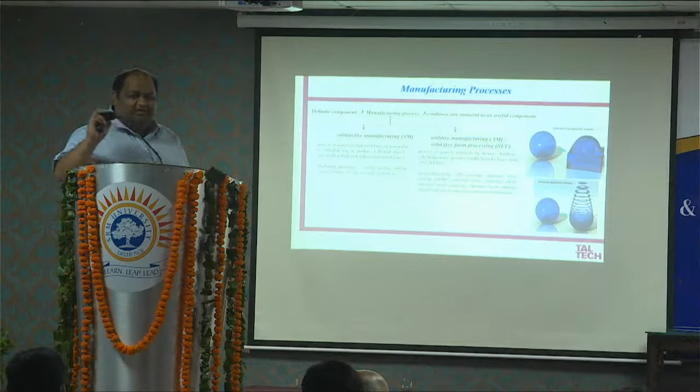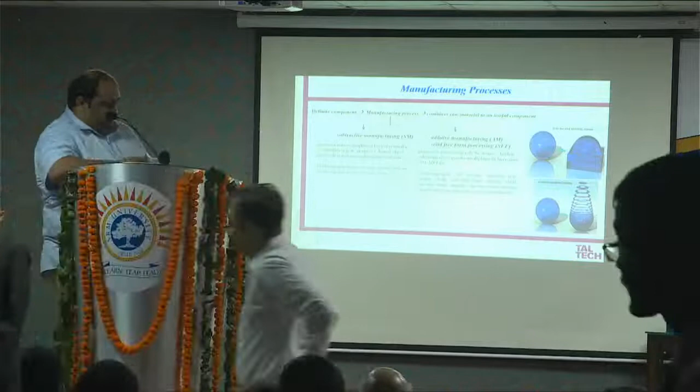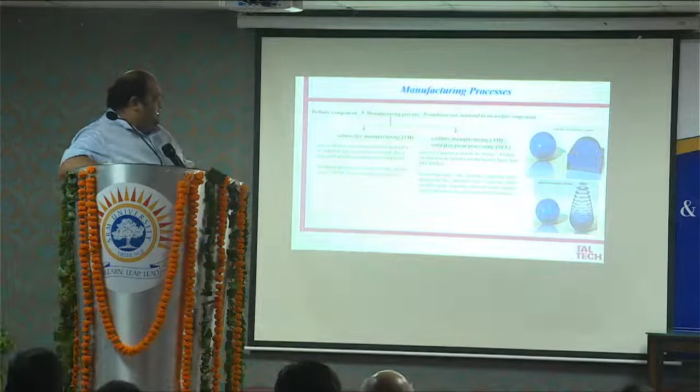Additive manufacturing is one of the processes that fits the theme of the conference, where we talk about manufacturing for sustainability, because as you see from these images, we use both conventional manufacturing and additive manufacturing to make the same component, like a sphere. With conventional manufacturing, we remove most of the unwanted material from a bulk to make the sphere. With the additive approach, we add material layer by layer, using only the amount needed, so there is minimal or nil wastage. It is one of the sustainable manufacturing processes that can produce three-dimensional components with minimum material usage.

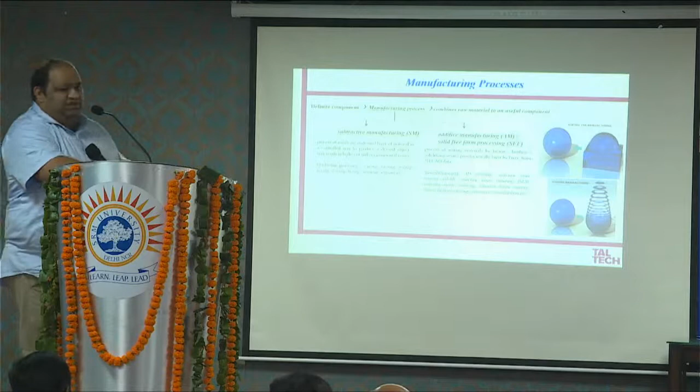However, when you want to produce such a component using some metal additive manufacturing processes, you may need excess material which can be recycled every time, because you need a certain specific dead weight all the time. But the material usage is still limited or restricted to that particular component being produced.

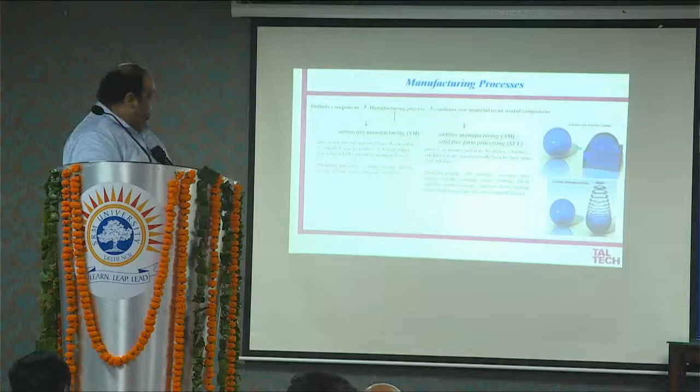It has a very big advantage because since we are producing these components layer by layer, we have flexibility in terms of geometry. You do not have to worry about the shape of the material, because in principle we can produce any shape without restriction. You also have flexibility in terms of geography, because you are not tied to any industry or setup at any particular location. You can design the part anywhere in the world and feed the data anywhere else.

This is very significant because even in a war field or a medical emergency, you can feed the data and produce any prosthesis or component at that particular instance where and when it is required. So the process is relatively quick with most polymer-based additive manufacturing processes. With metal additive manufacturing, it may take more time because of other constraints that consume time, but in general the process is rather quick with respect to the design approach, and it can be produced anywhere without restrictions.

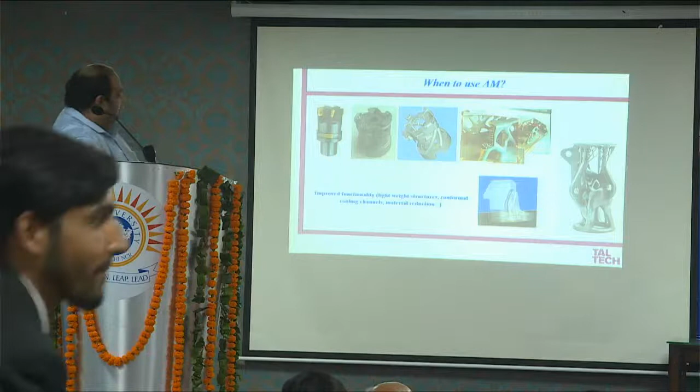And even within this complexity, they want to reduce the dead weight of the component. Instead of making a bulk of the component, they have introduced some kind of structures inside so that you can reduce the weight of the component by a third or even more. In such conditions where you want to improve the functionality, where you want to improve the life of the component by reducing dead weight, additive manufacturing will be one of the foremost manufacturing processes for manufacturing these devices.

Also here, the main focus is to reduce the dead weight and to increase the complexity. Assume if you want to produce such a shape using a conventional manufacturing process, you have to mill so many areas and it is going to take considerable time. But on the other hand, with additive, we can produce this with ease and without much time to expose.

This is a typical example. This is one of the burner heads which has been used by Siemens for quite a long time. And this one particular component is assembled from 18 components. So in order to save the assembly costs, Siemens has come up with the use of additive manufacturing technology where the same component can be built in one piece instead of assembling 18 particular components.

And for producing this particular component, Siemens has developed an additive manufacturing park in Sweden where they are producing this particular component for the whole year using 10 different machines. So even bulk manufacturing is possible through the additive route, and you can save the assembly costs by introducing additive manufacturing, because this will be the only process where you can save such assembly costs for such complex shaped or sized components.

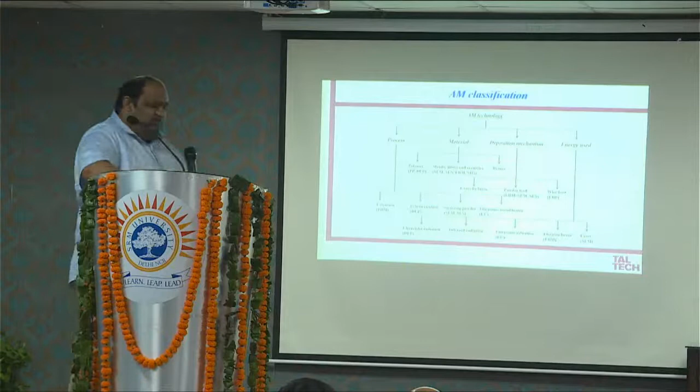So I have given the primitive classification of additive manufacturing processes over here. Initially, when the technology was introduced, they classified these processes under such categories depending upon the process which you are going to use, or depending upon the material which you are going to produce, or depending upon the deposition mechanism which you are going to employ, or the type of energy which you are going to use for depositing the material. Since all of these additive manufacturing processes are a layer by layer approach, we need some kind of energy to be used at every stage, at every layer.

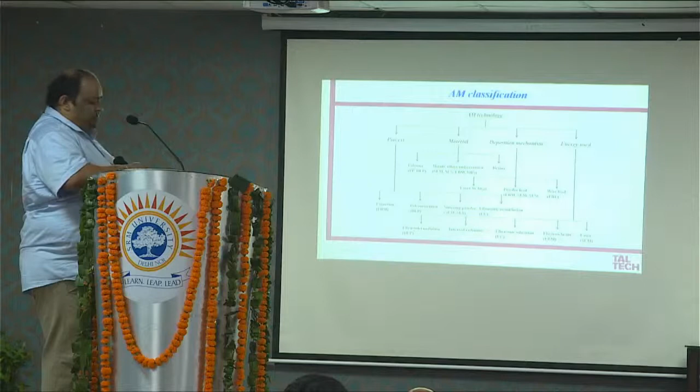Based on that, they can be classified. The energies that can be used for the consolidation processes can be ultraviolet radiation. In most of the polymer-based processes, you use ultraviolet radiation. Also infrared radiation is also used for most of the polymer-based processes. Ultrasonic consolidation is generally used for metals to be consolidated, electron beam welding and laser beam, electron beam melting and laser beam. So you can use either laser beam or electron beam, and nowadays people have also started using plasma for such additive manufacturing technologies, where they have used plasma for wire arc additive manufacturing processes.

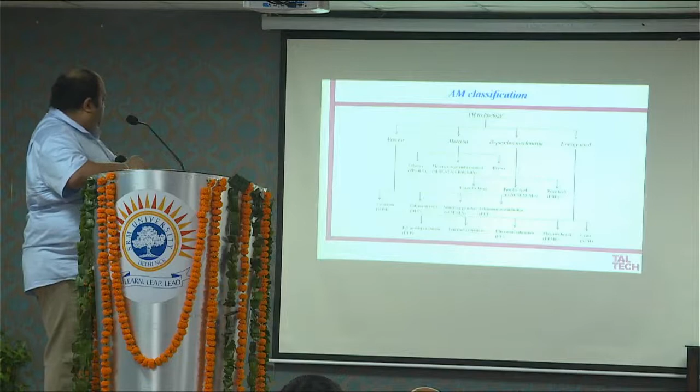And when it comes to processes, it's not working.

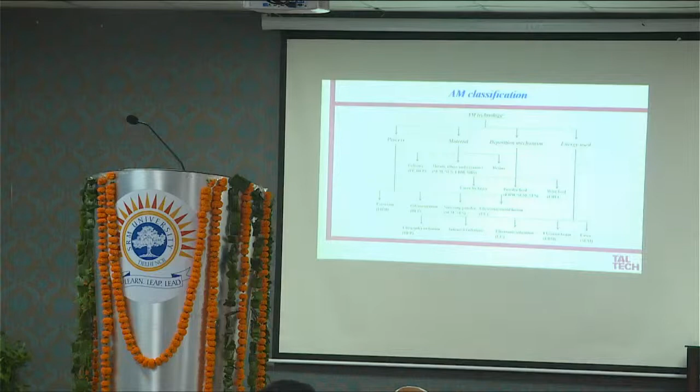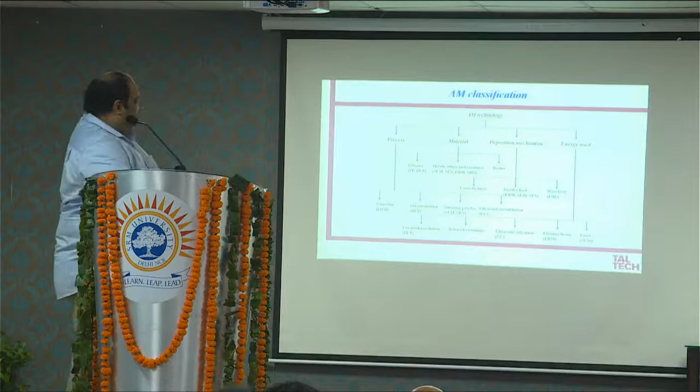Depending upon the processes used, they can be classified based on extrusion-based mechanism. This is fused deposition modeling, which is the most widely used polymer-based additive manufacturing approach, or based on photopolymerization or polymerization in combination with ultraviolet or infrared radiation, or using sintering of metal powders, or using complete melting of either metal powders or wires.

Similarly, depending upon the material, they are classified based on either metals, polymers, composites, or resins, and depending upon that, the processes are classified. The last but not least is using the deposition mechanism.

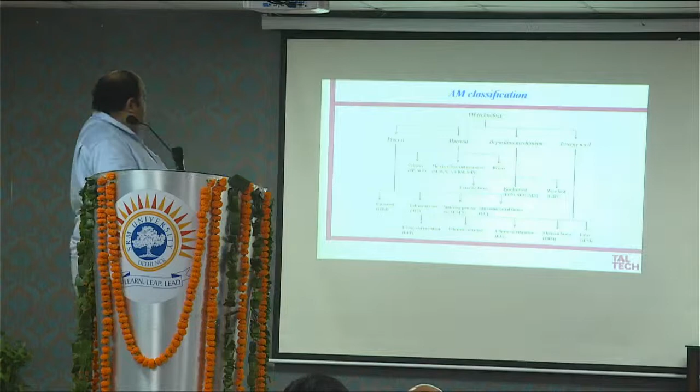Most additive manufacturing processes use raw material as powder, wire, or sheet. So based on that, you have either powder fed processes, powder bed processes, wire fed processes, or sheet based lamination processes, which are layer by layer. All these are layer by layer, but to be precise, sheet based processes. This is the primitive classification where people initially classified the available technologies.

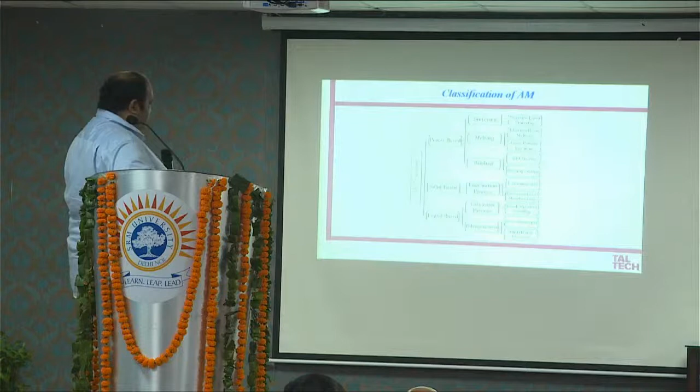Now, as per the ASTM standards, we have confined or clubbed several processes together, and now the classification is completely based on 6 different approaches: either sintering, melting, binding, lamination, extrusion, or polymerization. All the additive manufacturing processes come under these 6 different approaches.

For instance, there is a process called selective laser sintering, which is used for sintering either polymeric or metallic powders, which uses powder bed approach, and which uses polymers as the starting material.

When it comes to laser melting, we have several processes which fall under this category. It can be selective laser melting, electron beam melting, direct energy deposition, wire arc additive manufacturing. There are several processes that involve melting as a primary joining mechanism.

We also have binding based processes where you use external binders or resins, combining them with powders, and then you debind the resin later so that you get a 3-dimensional component.

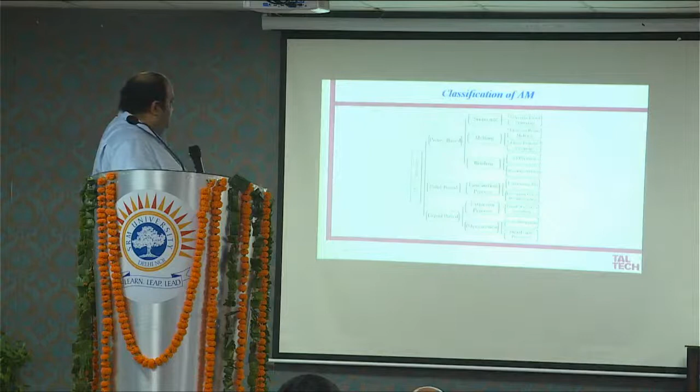Or you go for the least used process like lamination, where you use sheets connected together using ultrasonic vibrations, or the widely used polymer based process, extrusion based fused deposition modeling, which you can see in most labs, and photopolymerization, a typical example being the stereolithographic process.

So this is the basic 6 classifications used to combine all the present additive manufacturing processes in the market.

I will try to focus a little bit just on metal additive manufacturing, because that is where most of the interest lies nowadays, and try to give a glimpse of the available metal additive manufacturing processes.

The first is called powder bed fusion process. From the name itself, it's clear that we are going to use powder as raw material, powder bed as a deposition mechanism, and fusion or melting as a source of joining these powder particles.

There are a few processes which involve this particular approach: either electron beam melting or laser beam melting. It's clear from the name itself, either you are using electron or laser as the energy source. And then we also have direct energy deposition, which also uses laser as the energy source.

So the powder bed fusion process using laser is the most widely used metal additive manufacturing process, which you can find in most places even now in India.

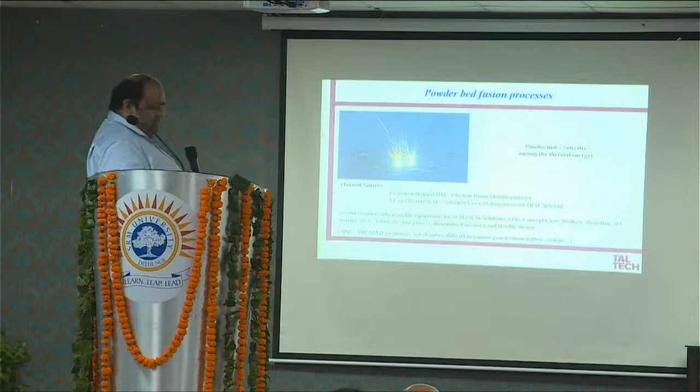And this can produce a wide combination of materials. We will see the combination of materials as we go by.

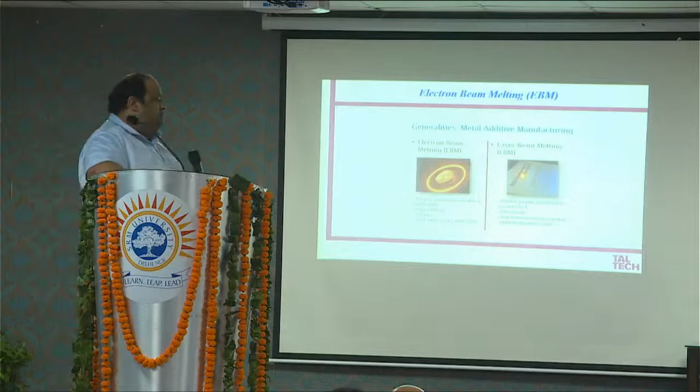The other one is, as I said, electron beam melting, where electron is used as an energy source. There are some fundamental differences between electron beam and laser beam melting, but more or less they use the same mechanism, same fundamentals, except the energy source is going to be different.

And the next is direct energy deposition. This uses either powder or wire as raw material. A laser is used as an energy source. Nowadays people are also using electron beam, and people are also using plasma as an energy source.

Basically, the energy source meets the raw material, either powder or wire, coaxially, just next to the plate where you are going to deposit your material. So the raw material comes in contact with the energy source, gets molten, and gets deposited next to the substrate or the area where it has to be deposited. Of course, this also goes layer by layer to have a three-dimensional component.

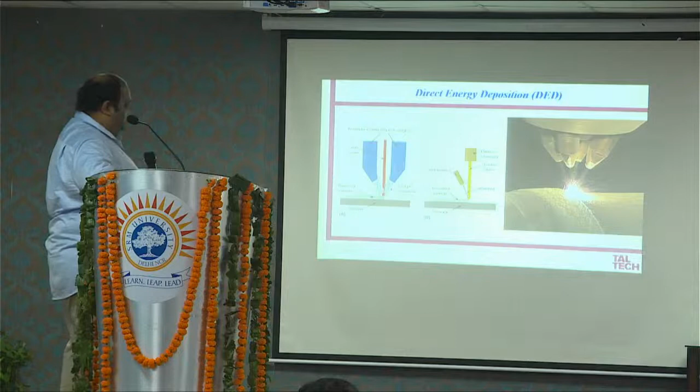The next is binder jetting. Binder jetting is a little different approach than the powder bed fusion process, because here we are using an external binder which is fused with the powder particles. So this is again a powder bed approach, where you are adding binders to the powder bed selectively, dictated by the CAD data most of the time.

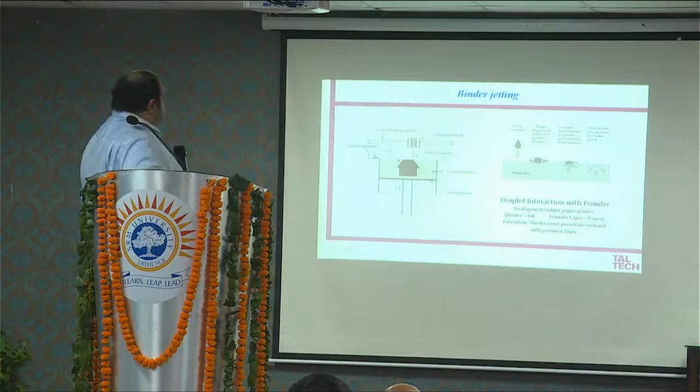This is a multi-step additive manufacturing process, because all the processes we've seen until now are single-step, where you try to produce a near net shape component from the raw material. But in this case, we produce a green compact, which has to be further sintered for extensive time to produce a three-dimensional material. So this is multi-step: you initially get a green compact, then the binder has to be debinded, and then you go for a sintering approach.

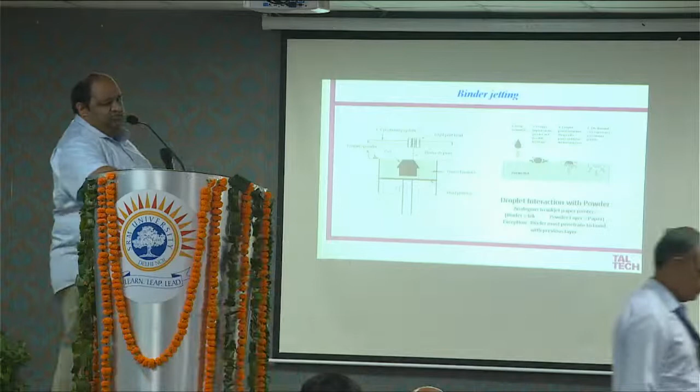So here you need conventional knowledge of sintering, because all the sintering-based defects you have in a normal sintering process, like porosity, distortion, warping, etc., you will also see in this particular process, apart from the biggest advantage of producing components in a three-dimensional manner with no restriction on shape and size.

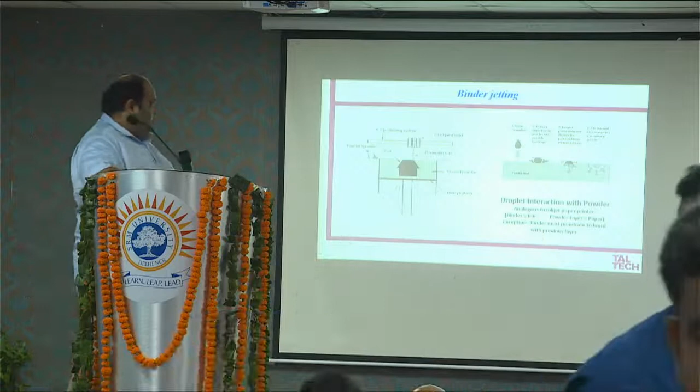The next approach is selective laser melting. This is what we saw is known as the powder bed fusion process. This is the most widely used metal additive manufacturing process. And like most metal additive manufacturing processes, we can classify it into two different steps.

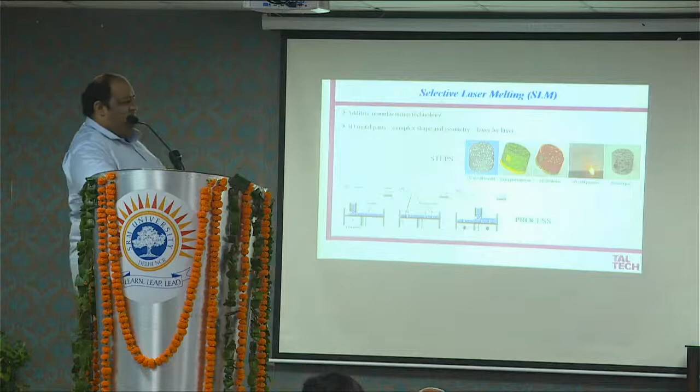The first step is the computational part, and the second step is the actual process. In the computational part, initially we need to develop a CAD model or a three-dimensional model through software. Then, since additive manufacturing machines need information layer by layer, we need to divide the entire information into a layer-by-layer format, known as slicing.

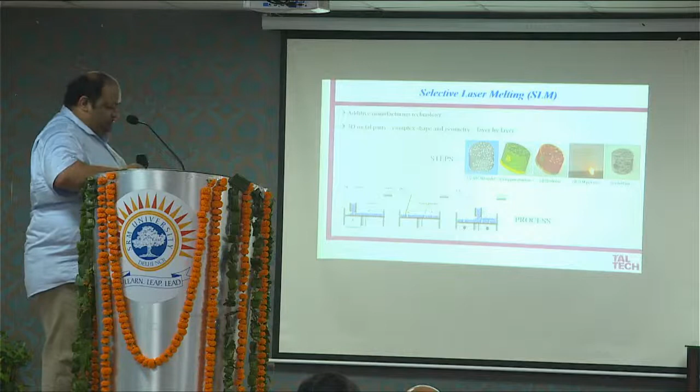Even before slicing, we need to introduce support structures. If you recall, the deposition takes place over a substrate plate. In order to remove the material easily from the substrate plate, we introduce support structures. These are nothing but hollow structures, normally weak, which use different process parameters than the bulk of the material. These support structures also have to be sliced, so this sliced data can be fed to produce a three-dimensional component.

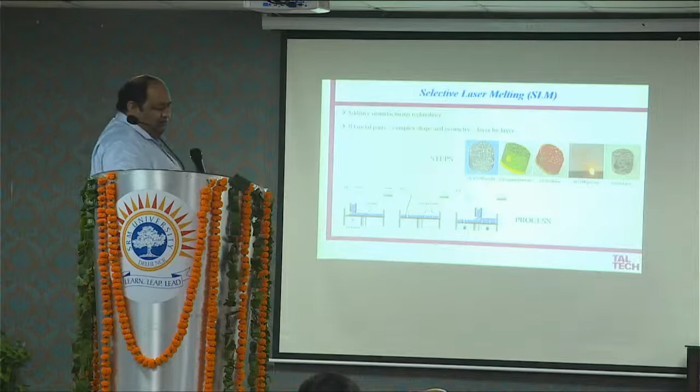When it comes to the actual process, this is the powder bed fusion process. You have a powder layer which is spread, and then the laser is illuminated, which selectively melts the powder particles. Then a second layer of powder is deposited, and this iterative process continues until the entire component is built.

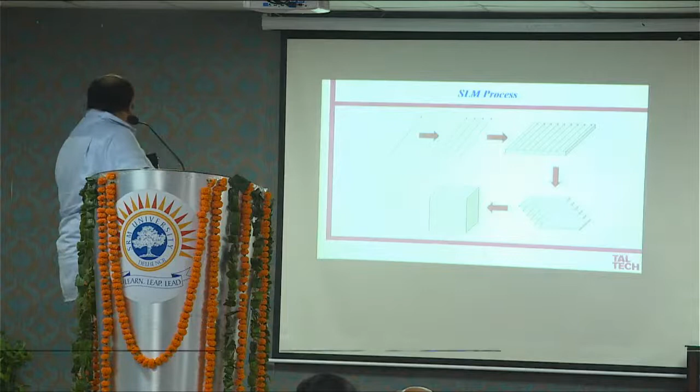Basically, this is how it works: you have a thin layer of powder melted by laser, and you have multiple laser scans within each layer, and multiple layers to produce a three-dimensional component. The advantage is you can produce any shape you want.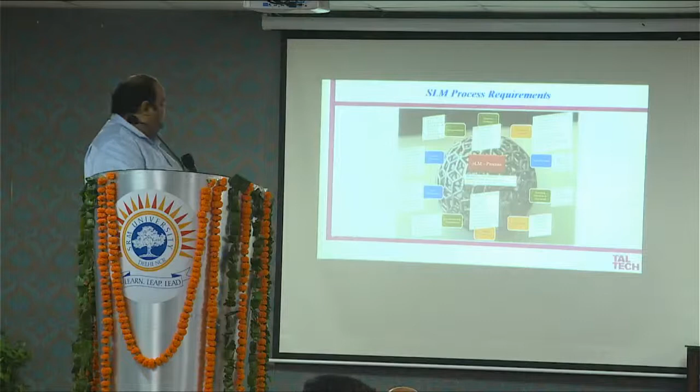There are a lot of parameters which affect this. I'm not going into the details of these parameters because they are quite extensive, but similar to any welding approach, you can select the process parameters through a combination of laser speed, laser power, and other laser parameters, and see where you have a very good melt pool, and depending on that, you can narrow down the process parameters.

If your process parameters are not correct, you may not get the intended shape of the specimen. Either the energy might be too little to build the specimen, or the energy will be too high so that you will have cracking in the specimen. So you need to optimize it such that the melt pool has sufficient strength and sufficient dimensions so that you will be able to produce your samples without any restrictions.

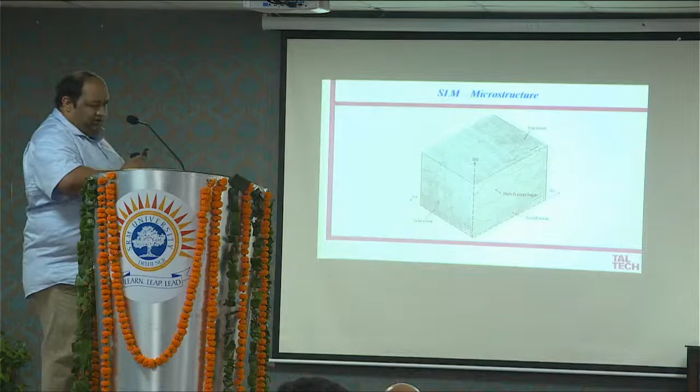The most important thing I wanted to mention is that any additive manufacturing process results in anisotropy in terms of microstructure and properties. The anisotropy in microstructure exists along different length scales, because the top view, side view, and front view each show different microstructural arrangements. So depending on how you test the sample, you get different properties, and this cannot be avoided. Even at the nanoscale, depending on the length scales, you get different properties which cannot be avoided.

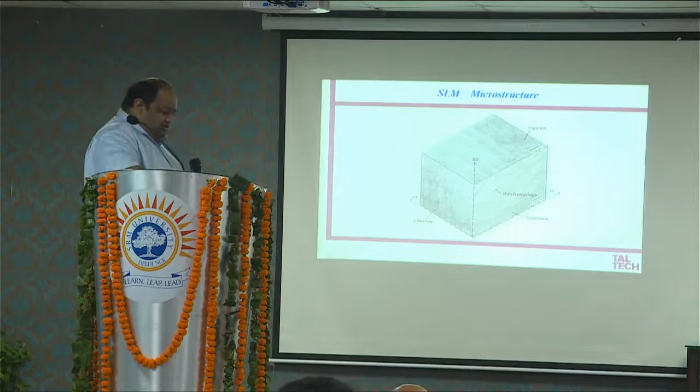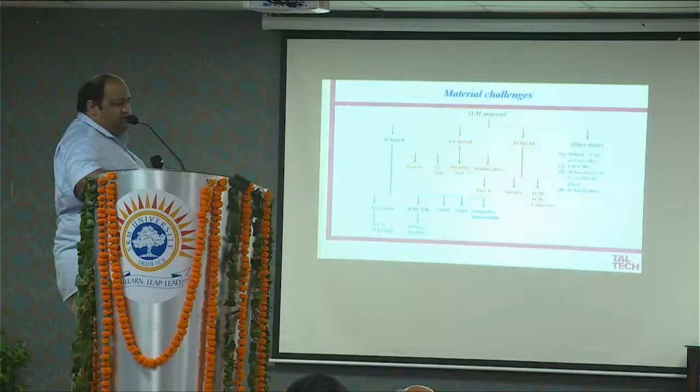Most of the material used for selective laser melting, people started with titanium-based alloys, especially for aerospace and biomedical applications. Then people looked at aluminum-based alloys, again for aerospace applications, and iron-based alloys. Nowadays people work with nickel-based alloys like nitinol for shape memory applications, Inconel for high temperature applications, and cobalt-based alloys for dental applications. This is one process that can produce most kinds of metallic materials available in the market today.

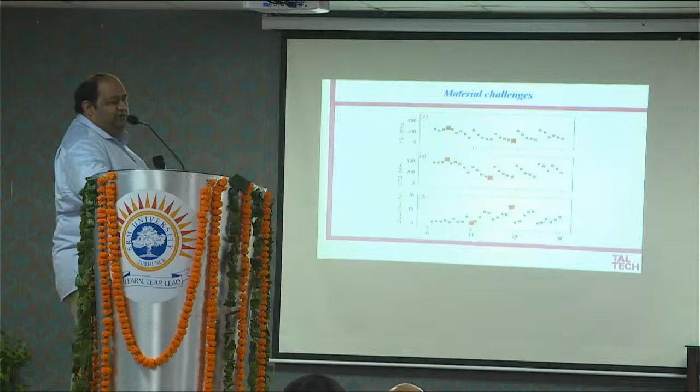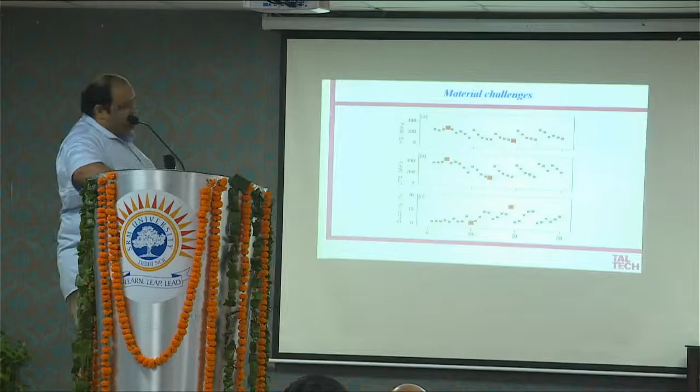But it also comes with a restriction. As I said, the properties are anisotropic. The same material can have a different set of properties depending on the laser parameters or processing conditions used. So it's very hard to match any property with any material, because this one material shows different properties depending on processing conditions. We cannot give one numerical figure for property, but a range that varies widely in both strength and ductility. This can be seen as an advantage, since you can tune mechanical properties based on applications, but if you change processing conditions for defects, you also change mechanical properties to a large extent, making it difficult to calculate a factor of safety for any application.

To summarize, there are several additive manufacturing technologies available in the market, but most metal additive manufacturing runs through powder bed, laser-based powder bed fusion, or the selective laser melting process. There are several challenges in terms of microstructure and properties which must be overcome in the coming decades so that products from additive manufacturing can be used for wider applications. At the moment, most products produced using additive manufacturing or selective laser melting are used for static applications, especially because of the anisotropy in microstructure. If used for dynamic, moving, or kinetic applications, the material fails prematurely. So it works well for static applications, but not for dynamic applications.